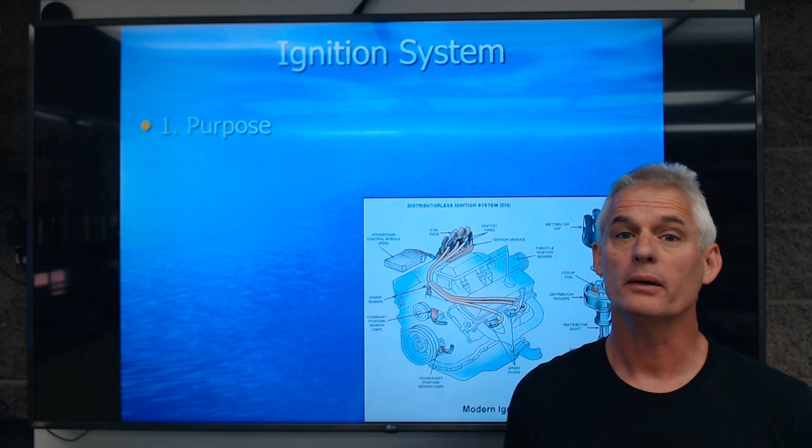Morning Auto 2. We're going to begin talking about the ignition system today, starting with the purpose of the ignition system. I'm going to give you an overview. In Auto 1, ideally I would have gotten to ignition system, but I didn't, so this may be a first go at it for many of you.

Here's a set of spark plugs with all different kinds and conditions. The main purpose of an ignition system is to ignite or create a spark that's going to thoroughly ignite the air-fuel mixture to do three things: maximize power, which is our teenager desire, maximize economy, which is your parents' desire, and minimize emissions, which hopefully is all of our desire.

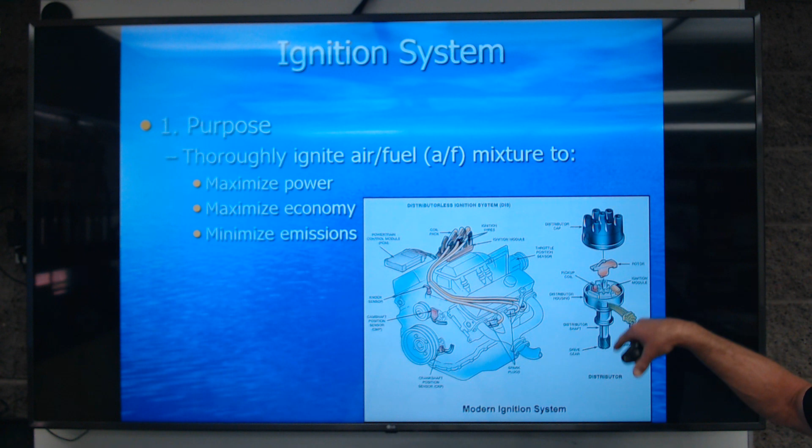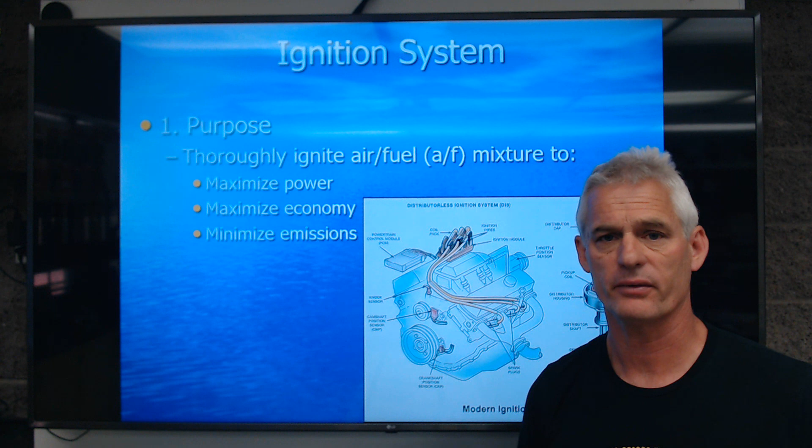Here's a simple old school ignition system with an electronic distributor. Here's what we call a distributorless or coil pack ignition—those go back several generations now. In any case, we want to thoroughly ignite the air-fuel mixture, which at sea level, the stoichiometric air-fuel mixture is approximately 15:1, ideal for power, economy, and emissions.

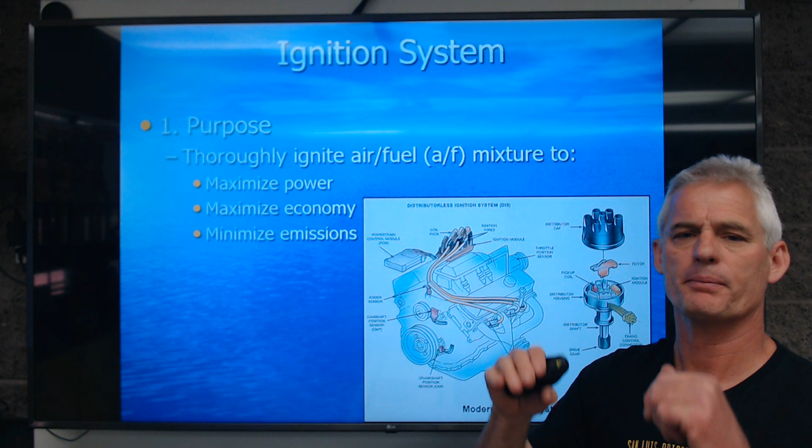If we want more power, we typically go richer. If we want more economy, we typically go leaner. And to minimize emissions, we stay in a happy balance between rich and lean.

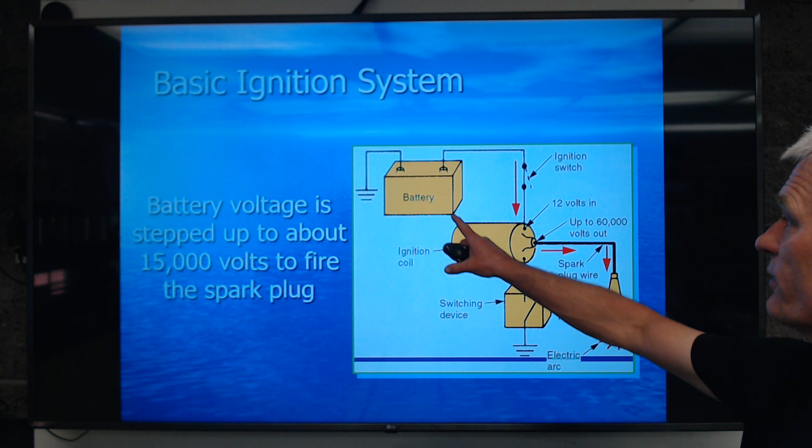A basic ignition system is going to jump up battery voltage, or once the car is running, charging system voltage, from approximately 14 volts to as much as 60,000 volts. That's kind of an average—most cars idle at about 10,000 volts. Under load, going up a grade, you might see 30, 40,000 volts.

So you've got a 12-volt battery, and charging system voltage when the car is running would be about 14. The ignition coil is a step-up transformer. This is an old school picture showing one coil for all cylinders, with some sort of switching device to turn this transformer on and off, and we'll talk about why. We're going to boost the voltage up to be able to jump that gap.

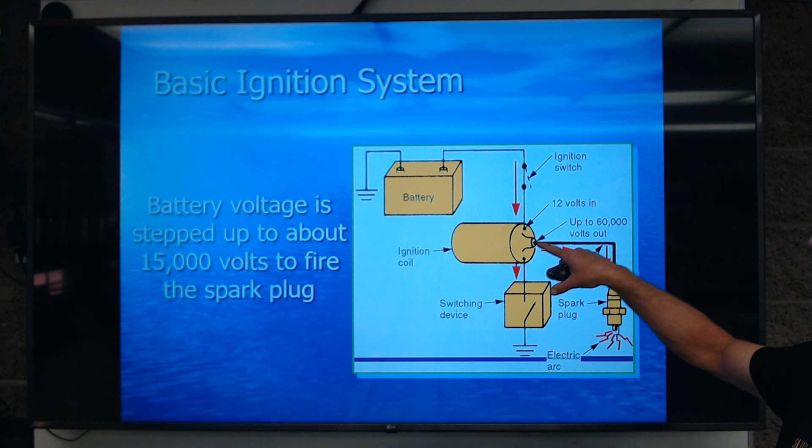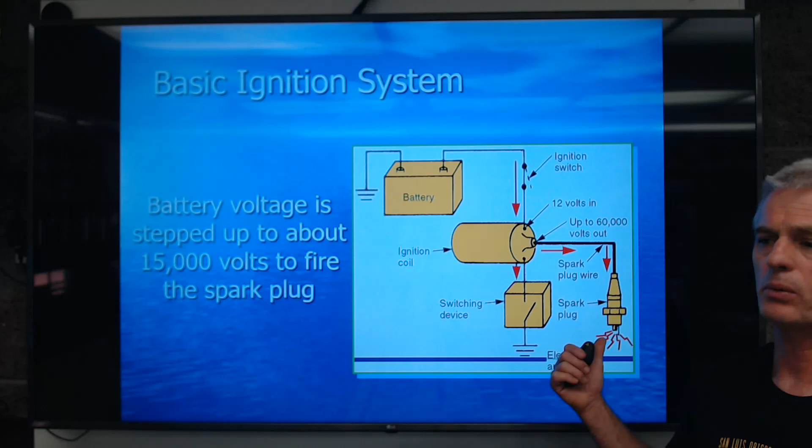That gap is difficult to jump, not only because of its distance, which is on average between 30 and 60 thousandths of an inch—not a very big gap—but cylinder pressure, air-fuel ratio, etc., will also make it very hard for the spark to jump the gap.

So the general function of an ignition system is we're going to turn this spark ignition engine on and off. Now, that was more true in old school cars. Today, when you shut the key off, we're turning the coil off, we're also turning the fuel pump off, and we're also turning the computer off, etc.

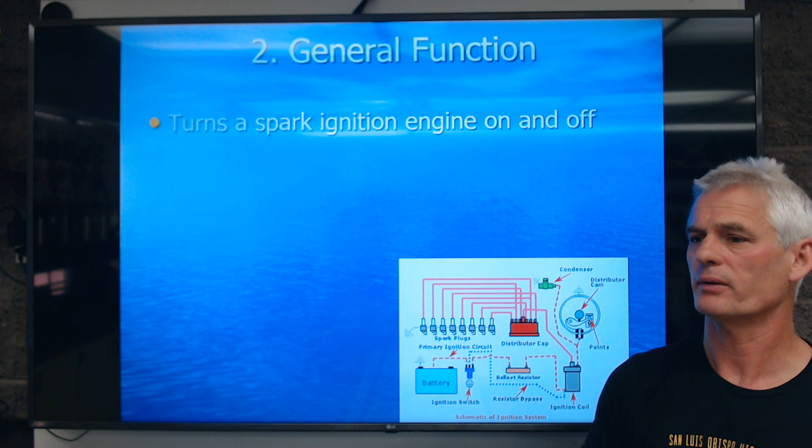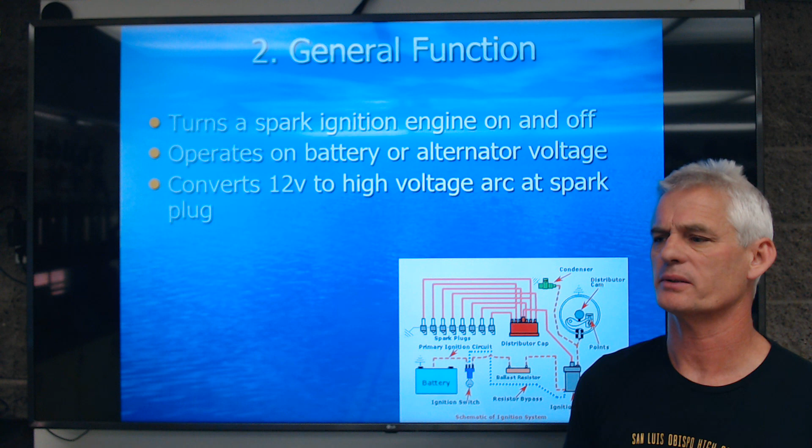Secondly, we're going to operate on either battery voltage when we're cranking or alternator voltage when we're running. We're going to convert 12 volts to a high voltage arc at the spark plug—and again, I say 12 volts generically, but when the engine's running, it's approximately 14 volts. We're going to distribute the spark to each cylinder in the correct sequence and at the right time.

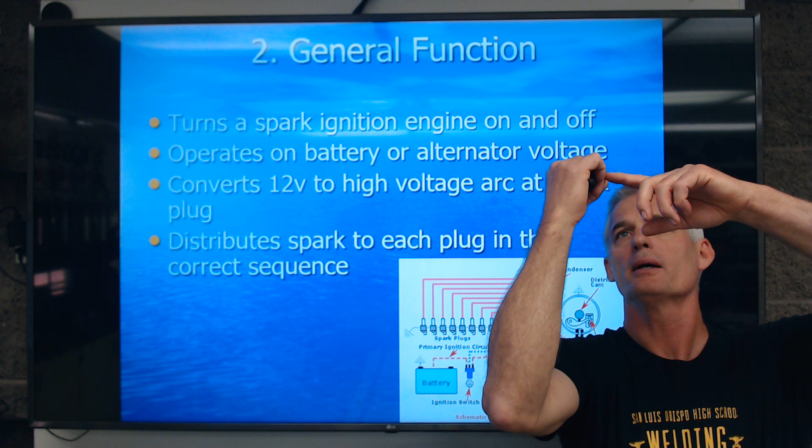So the right time—here's my piston: I go down on intake, I go up on compression, and I go down on power. The spark has to occur before the power stroke starts, obviously. In reality, we have to start the spark, typically at idle, about 10 degrees before top dead center, because it takes time for the explosion to expand and get ready to push. The faster the engine spins, the earlier we have to make the spark occur.

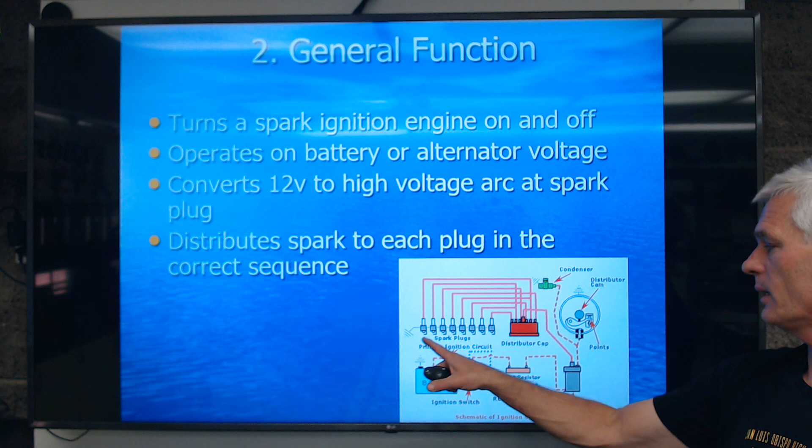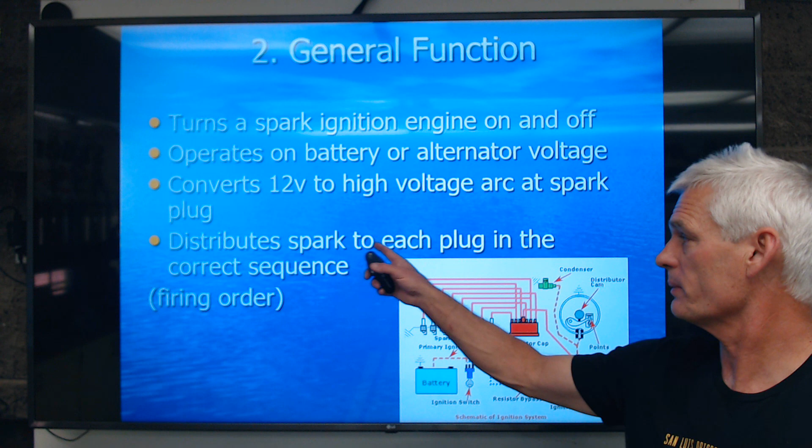Here's an old school distributor system with a distributor cap, 8 spark plugs, ignition key, a ballast resistor, a single coil, and a distributor with points. This was all gone by the mid-to-late 70s, but that is a basic old school ignition system. And when we distribute the spark to each plug in the correct sequence, we call it the firing order.

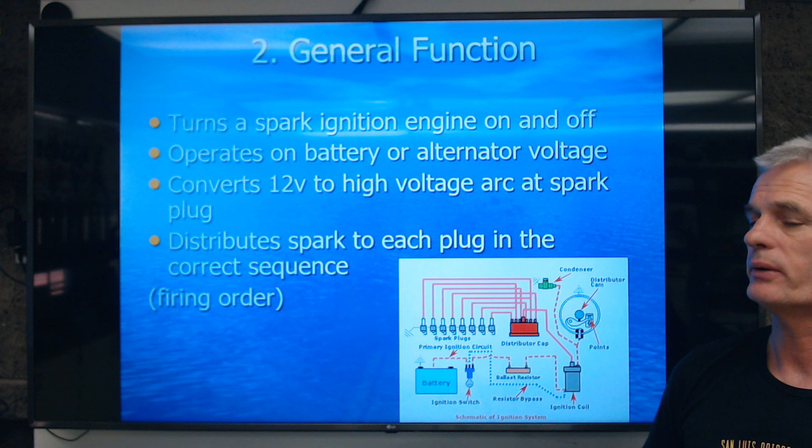So which cylinder is at the end of its compression stroke and needs a spark, and exactly when we do it, that would be timing. So we'd say, yes to number one spark plug as an example, but exactly how many degrees before top dead center is the timing.

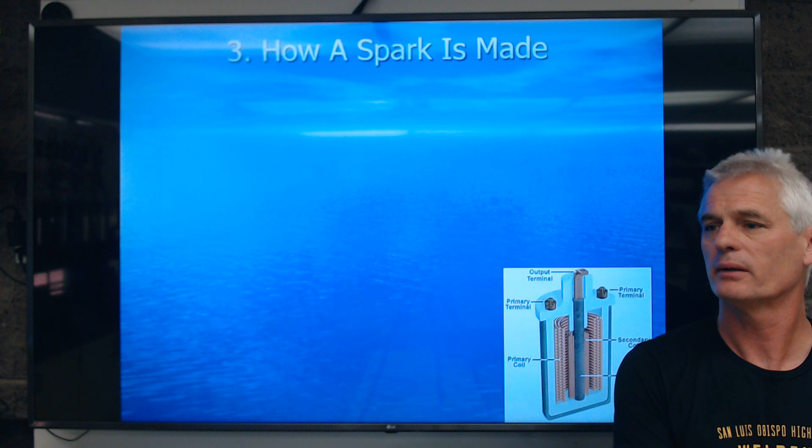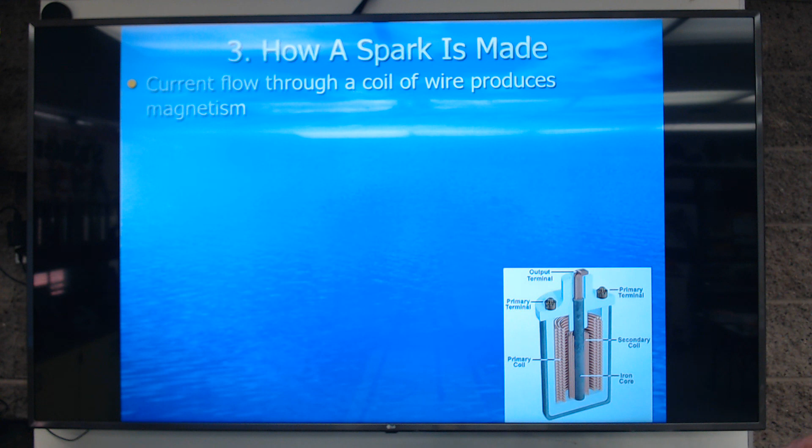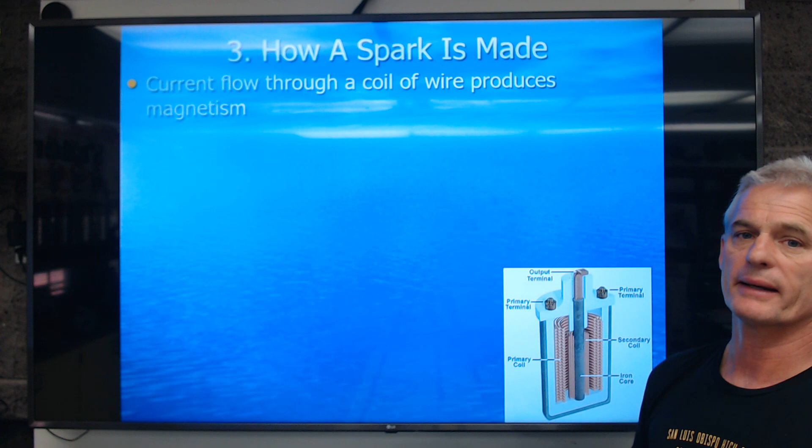How a spark is made: current flow through a coil of wire produces magnetism. Here's a picture of an automotive coil, and the insides of part of a coil. This is the primary wrapping of wire, insulated with plastic coating. If I put current through this coil of wire, I'm going to produce magnetism, and we call it an electromagnet.

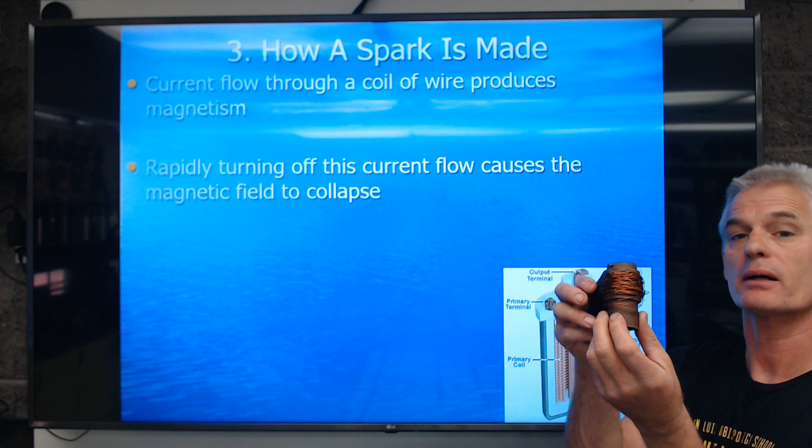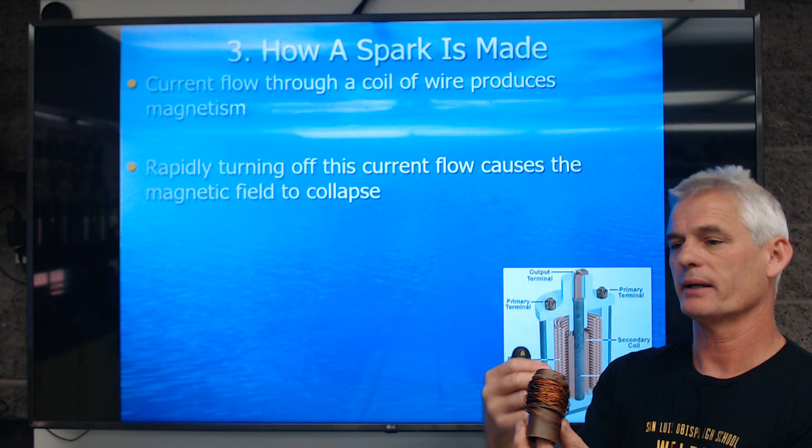And if I rapidly shut off the current flow through this coil, the magnetic field collapses out through air. If I have an adjacent coil—this one here is the secondary, which is actually down the center, because it both collapses out and in—I'll get a big surge in that adjacent coil. So a second adjacent coil will receive an induced high voltage current surge.

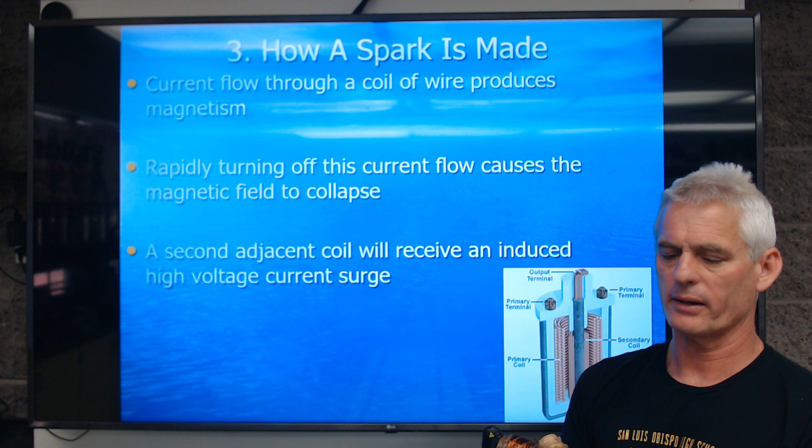Induced means to put into. So this guy, if I put current through this and shut it off, the magnetism causes a high voltage boost in this second coil, and the boost is dependent on the numbers of windings. The primary winding is a few hundred turns of about 18 to 20 gauge wire, and this is several thousand turns of super fine wire.

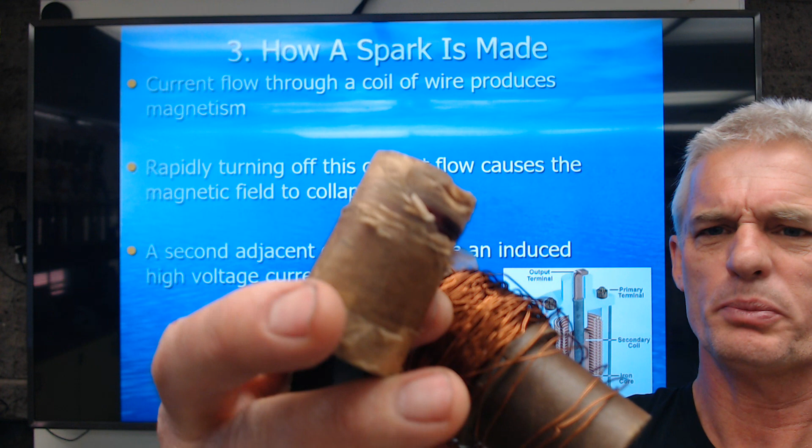I'm going to go up to the camera, I don't even know if you can see it, it's like hair, super super fine. So this is what we call coil action: turning on the electric current flow through the primary windings of the coil, then shutting that off, which causes a high voltage induction into the secondary winding, causing a boosting effect in the voltage—that's coil action.

The transformers on the power poles in your neighborhood are step-down transformers. I believe they step down from approximately 4,000 volts to 110 volts. All houses have two 110-volt lines going to them. If you need 220, which most houses do for some device like an electric dryer, oven, or hot tub, we combine those two 110-volt wires, or legs, with a special breaker on the panel.

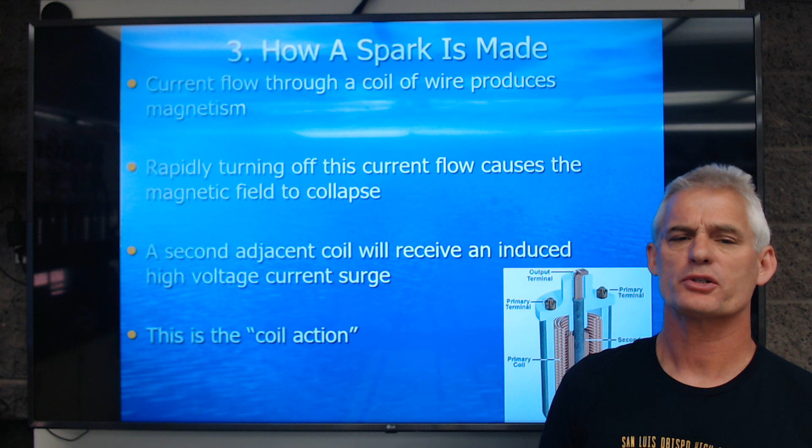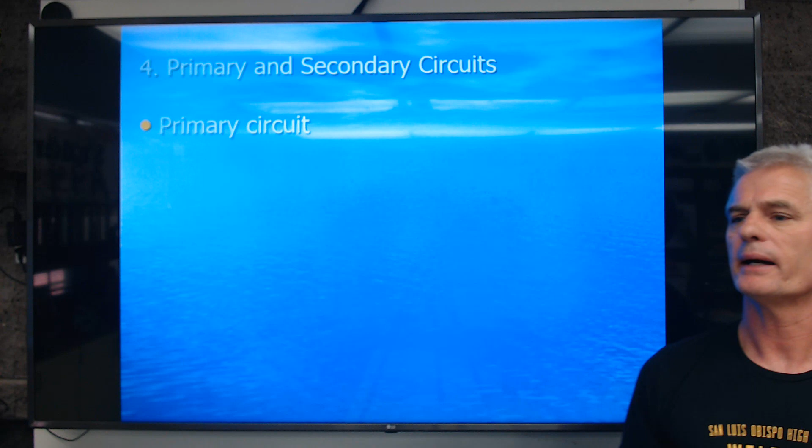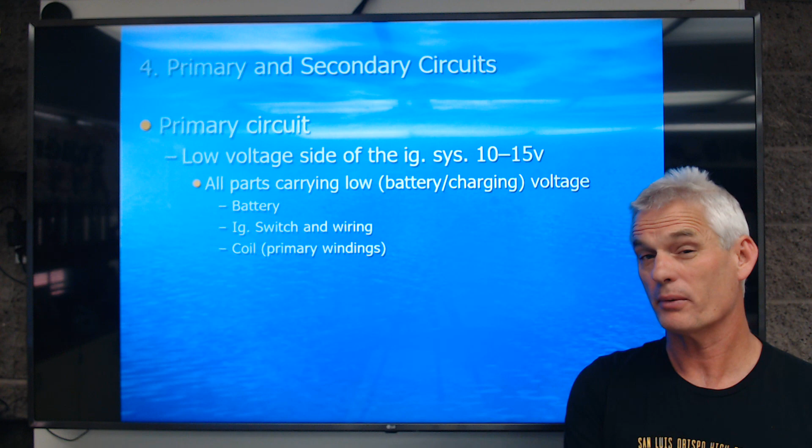So there's two circuits to an ignition system: the primary circuit and the secondary circuit. The primary circuit is all those low voltage components in the ignition system—all parts carrying battery or charging system voltage: the battery, the ignition switch and wiring, coil primary windings, which I already showed you, and a switching device.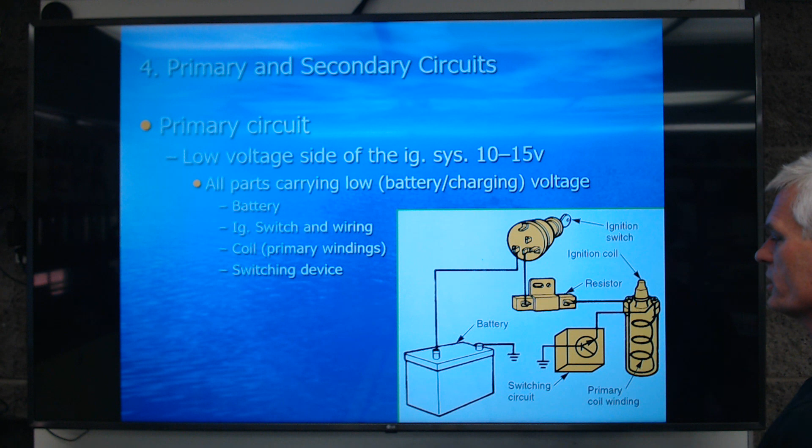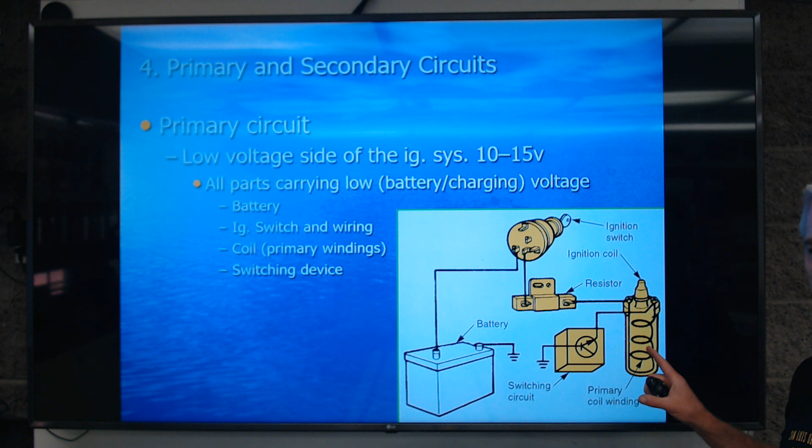So now if you look at the picture, the primary circuit is all the low voltage carrying components: the battery or alternator, ignition switch, whether it's a key start or push button. Older cars have what's called a ballast resistor, some sort of switching device to turn the current flow through the primary windings of the coil on and off. This picture isn't very accurate since it only shows 3 loops, but there's actually several hundred in the primary winding. That's the primary side of the ignition system, all the low voltage components.

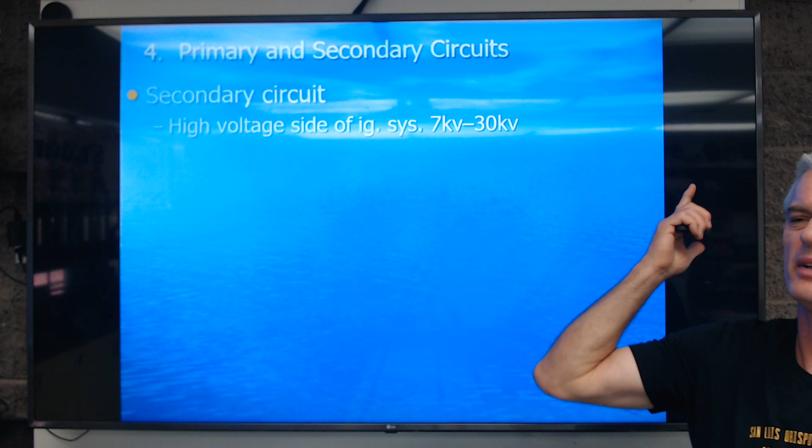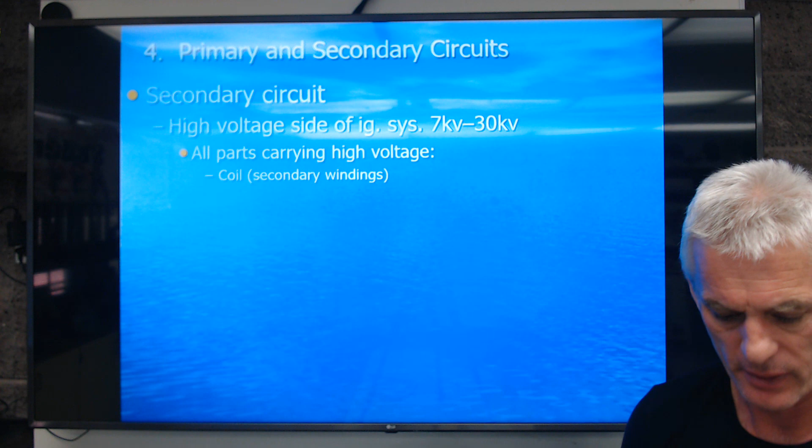Here's the secondary side—the high voltage side. I say 7 kV, 7,000 volts, up to 30,000 volts. Can go higher, usually not lower. So that secondary is all the parts carrying high voltage: the coil secondary windings, the one I showed you, the hair-like wire.

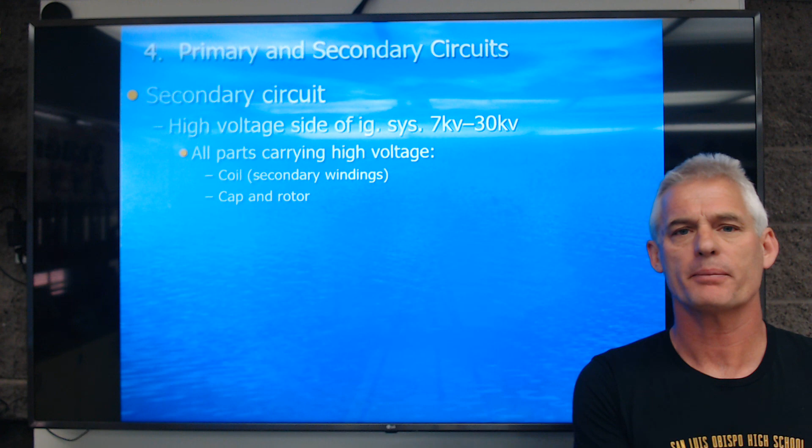Cap and rotor, I'm going to show you this in the picture. If we have a distributor type system, it's got a cap and rotor, then plug wires and plugs. All cars have spark plugs no matter the type of system—the only cars that don't are diesels. The distributor has a cap and a rotor that spins and distributes the spark from the center coil terminal to each one of these in the correct firing order.

Well, this is old school cars—we got rid of the distributor and cap and rotor on GM passenger cars in the late 80s.

Honda's always the last one to change everything. Honda changed away from a distributor on their Civics. I believe the last year for the distributor was 2000, and 2001 is coil on plug.

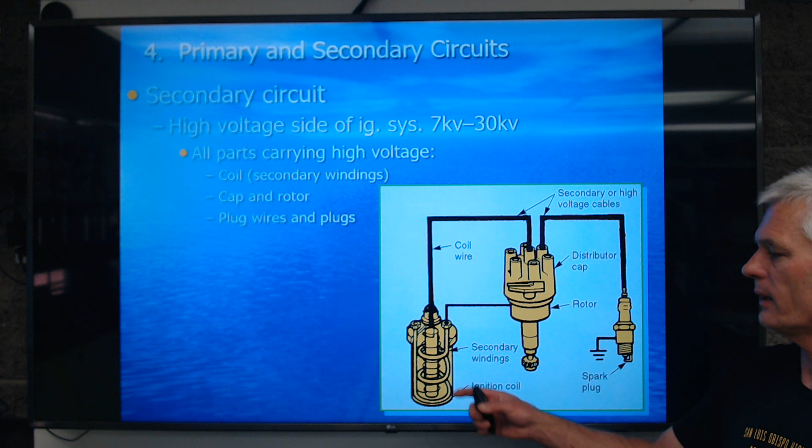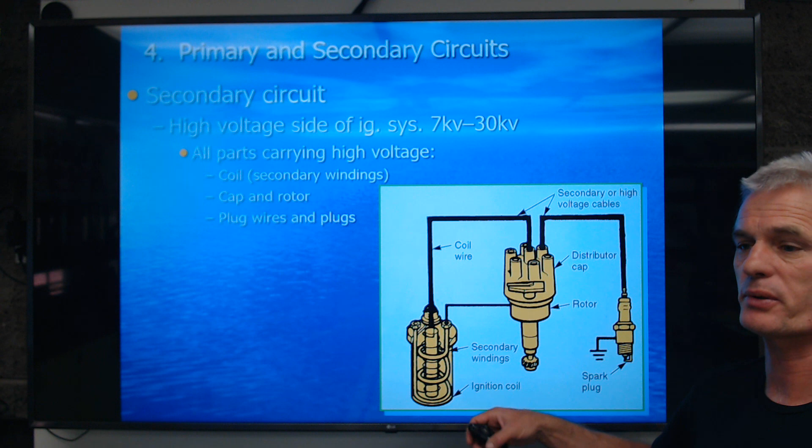This is a single coil. All cars today have either one coil pack, which is a group of 2 or 3 coils, or they have individual coils per cylinder. That's the secondary circuit. So I'm going to talk about types of systems really quick.

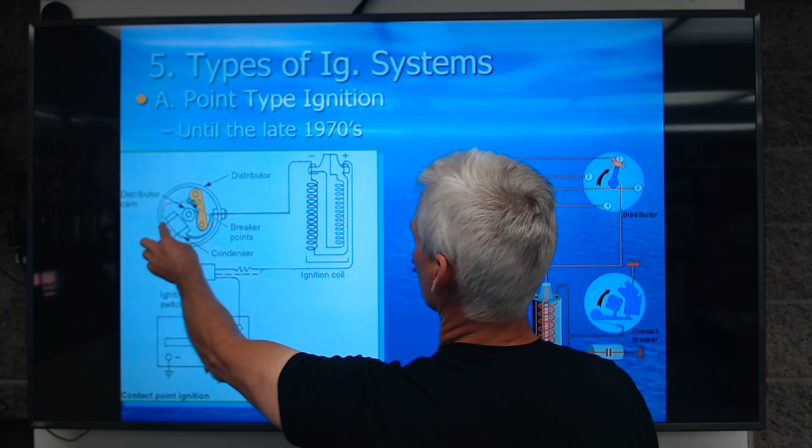The first one is a point type system that we had until approximately the late 70s, where you had a battery and an ignition switch that sent power through the primary windings, making a magnetic field through these little contact points to ground. This is a spinning shaft inside the distributor. When it pushes on that rubbing block, it opens the points, which breaks the contact to ground, which stops the current flow, which causes a magnetic field collapse and a high voltage surge that goes over to the spark plugs. That's a point type system.

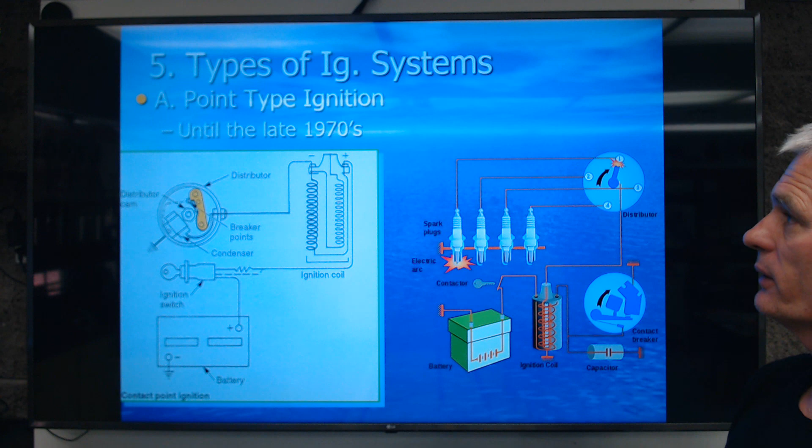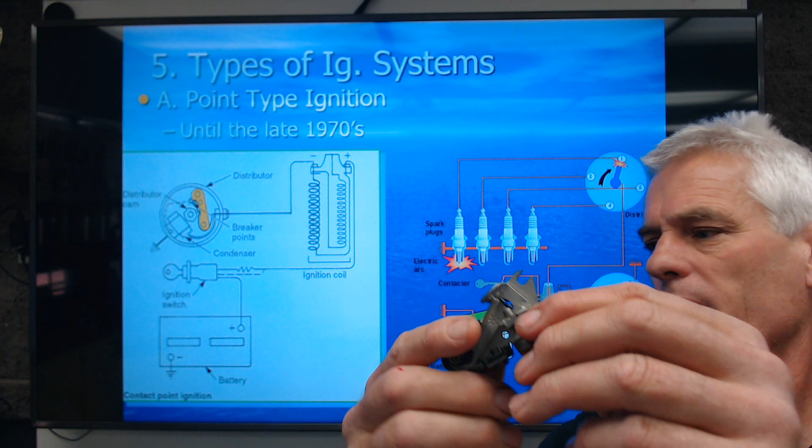I'll grab a set of points and show you here. So here's a set of ignition points, these little guys. I think I can make it so you can see them in the camera. So when this would open like that, that would break contact to ground or provide contact to ground.

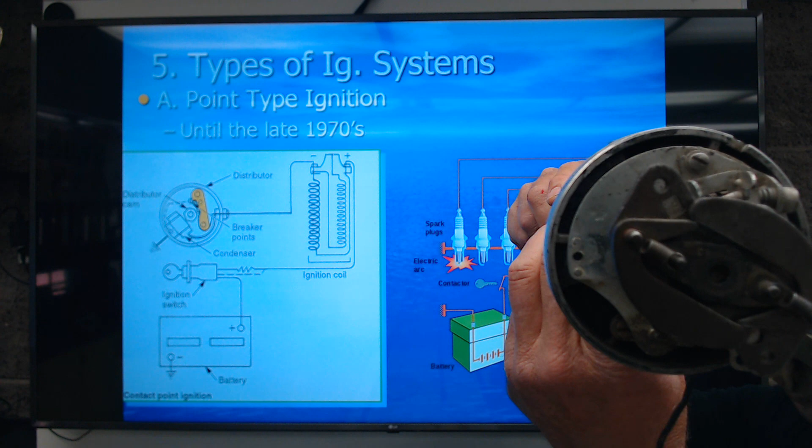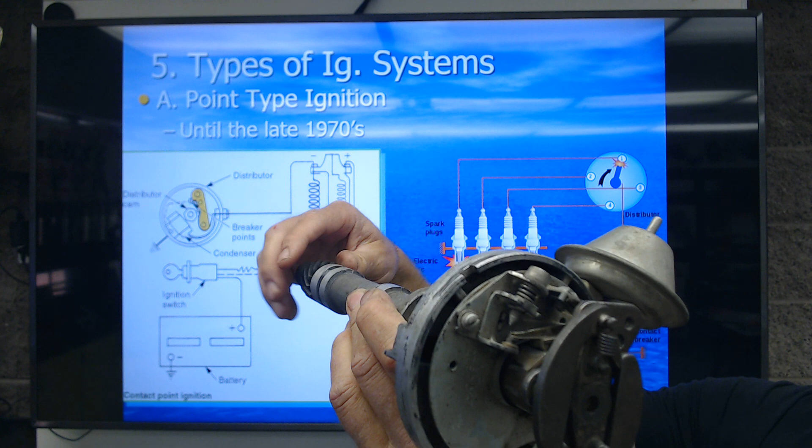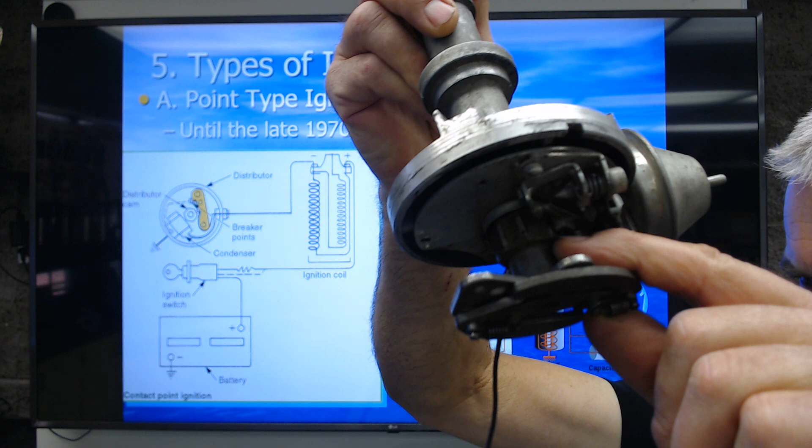So here's a point type distributor. Hopefully you can see those points. I don't know if I have enough light there. As this guy turns around, you'll notice the little point right there is going to open. So there it opens right there, and closes and opens. And I'll show you what it's touching - it's touching right there. Let me see if you can see it with the light. Not as easy as you think to do this.

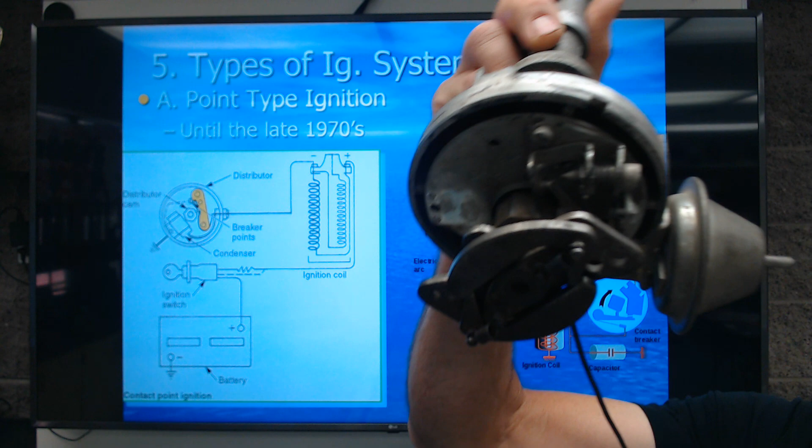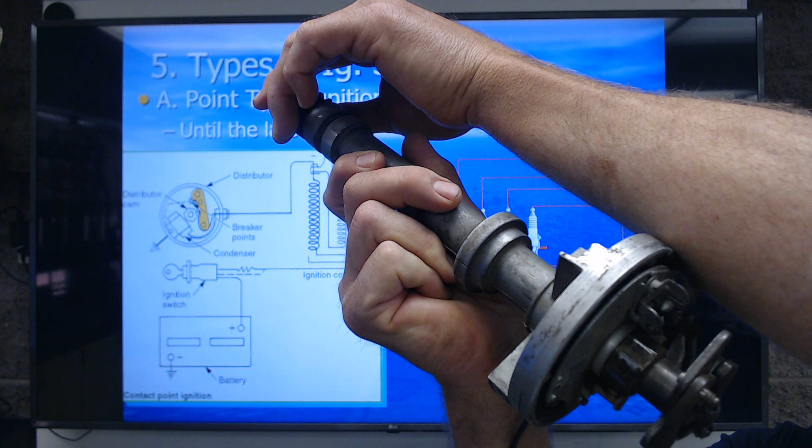Hopefully you can see where that thing's rubbing right on that distributor cam. So this cam has several points - each tip or point on it, we call it a distributor cam, as you see it spinning, corresponds to the number of cylinders. This is an 8-cylinder, so there's 8 of those evenly spaced around the circumference of the shaft of that distributor. So that was till the 1970s.

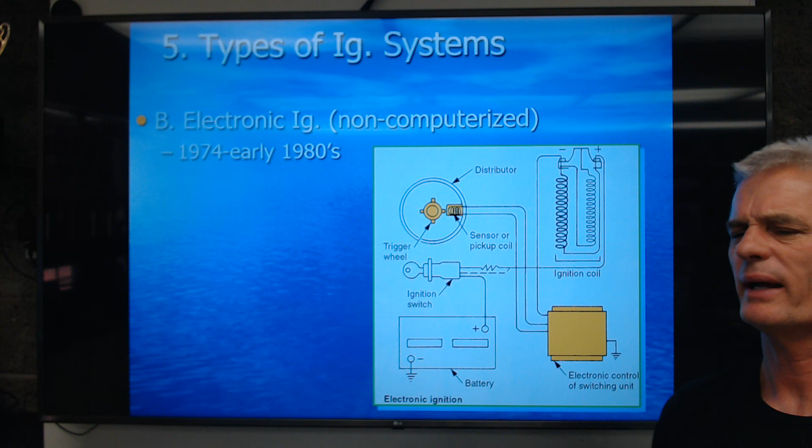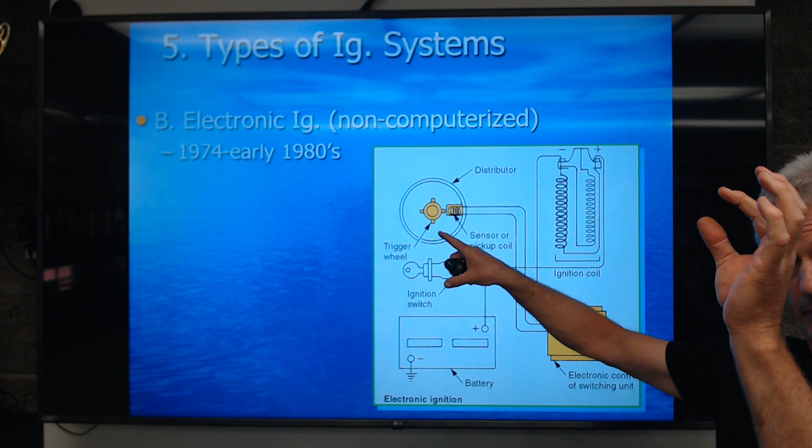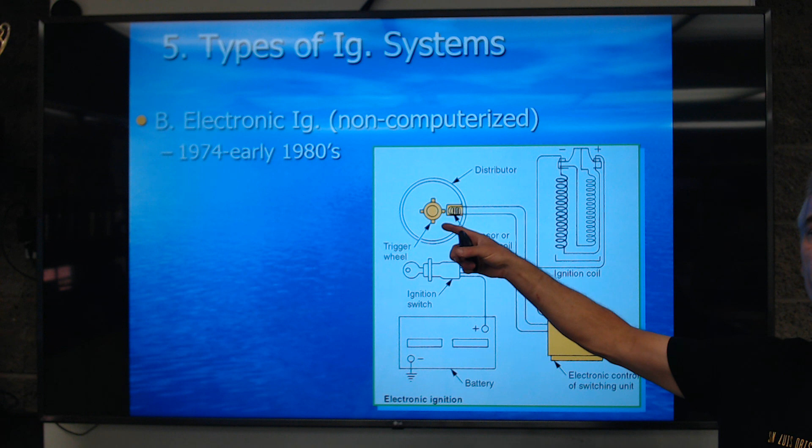So if I can get this thing to advance, there we go. In 1974, approximately to the 80s, we went to what's called electronic ignition. We still had a single coil firing all the cylinders, still got spark plugs, still got a battery and ignition switch. But instead of having those rubbing, contacting points, which every time they would open would arc and burn the faces of those points - these little faces down in here would get burned every time they open and then close and open, you get an arcing there - that became a high failure rate, and we wanted to improve emissions.

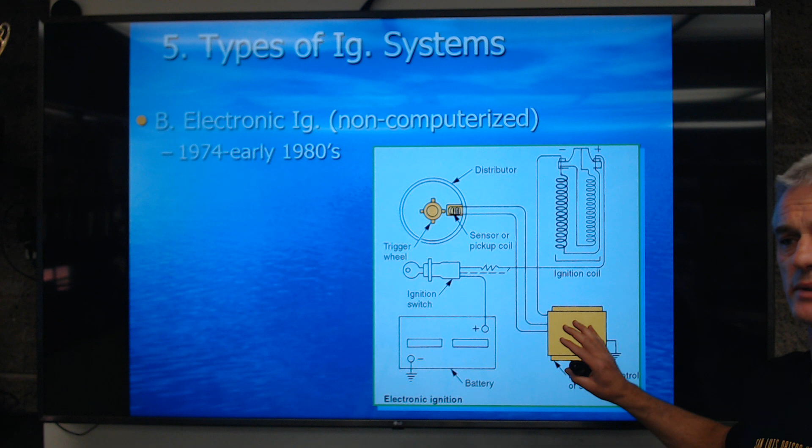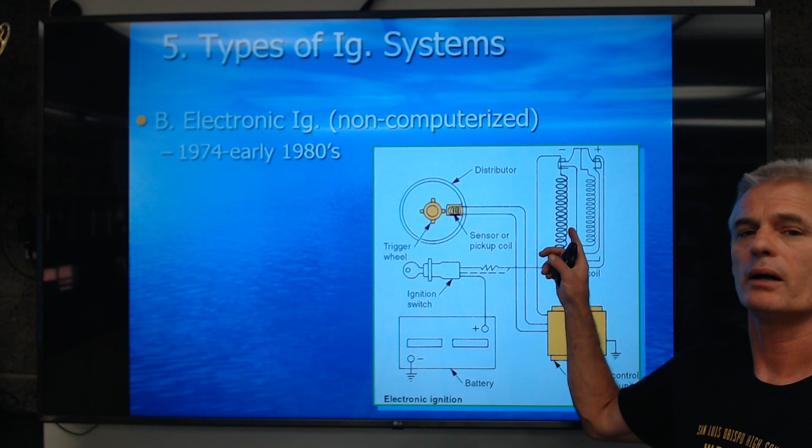So we wanted to get ignition more stable and consistent. So we figured out we could come up with what we call a magnetic pickup with a transistor, which is a fully electronic on-off switch. And with these two together, we could turn on and off that coil primary circuit much more quickly, which causes a hotter spark, and much more dependably too.

In the early 80s to late 80s, we came up with computerized electronic ignition. Still had a distributor similar to what you had, but now we had a computer involved. So the computer is going to say, okay, given this throttle angle, the vehicle speed, gear shift selection, the amount of load against the vehicle, I want 42 degrees before top dead center. So the computer is involved in adjusting when the timing occurs, and you're no longer able to adjust it at this point - you're not supposed to.

So here's kind of a summary: point type until the 70s, electronic ignition into the 80s, computerized ignition early 80s to late 80s, and then the next system is the DIS.

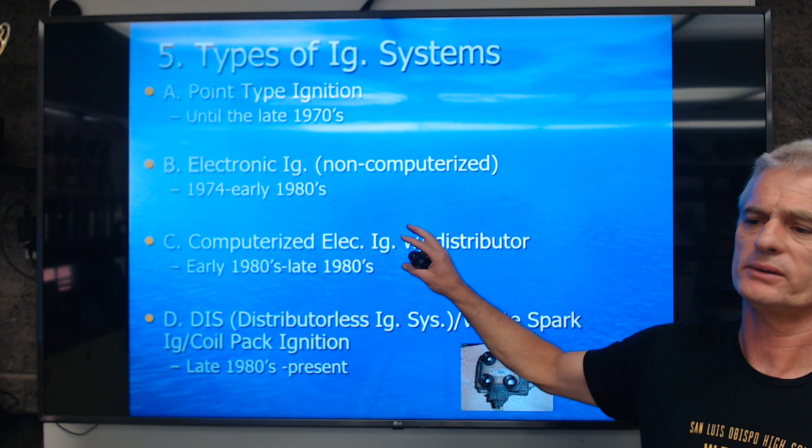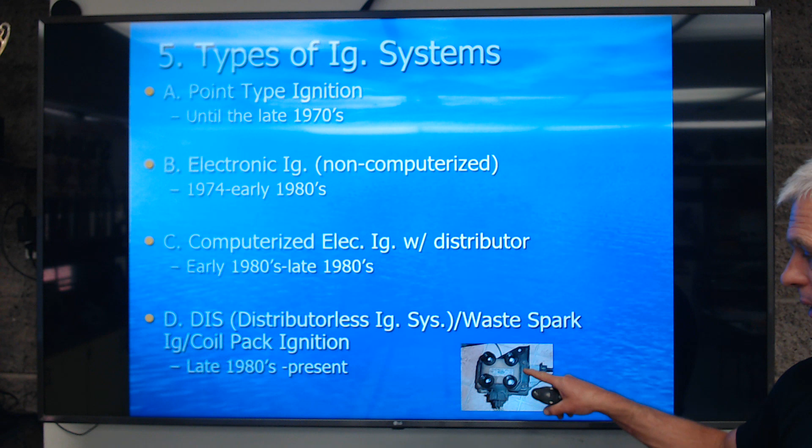The DIS is also known as a waste spark system or a coil pack ignition. So there's a picture of a coil pack - it's actually a coil here firing these 2 cylinders and a coil here firing these 2 cylinders. I'll grab one sec - so here's a coil pack.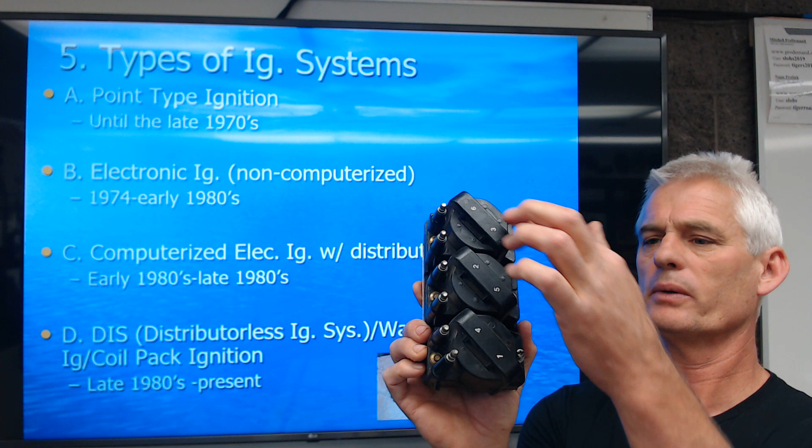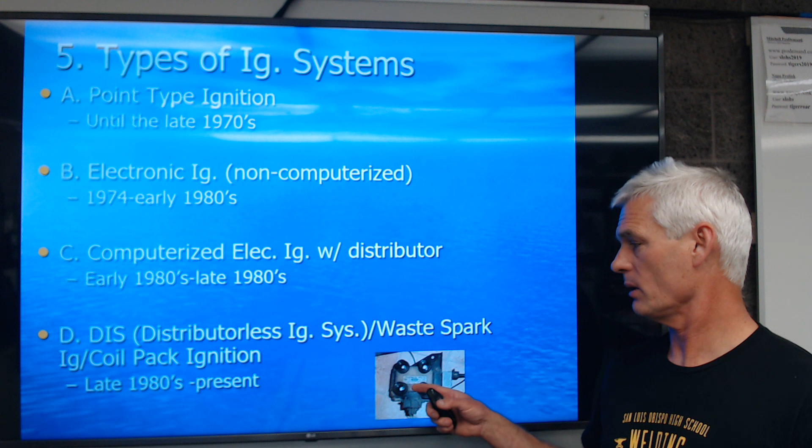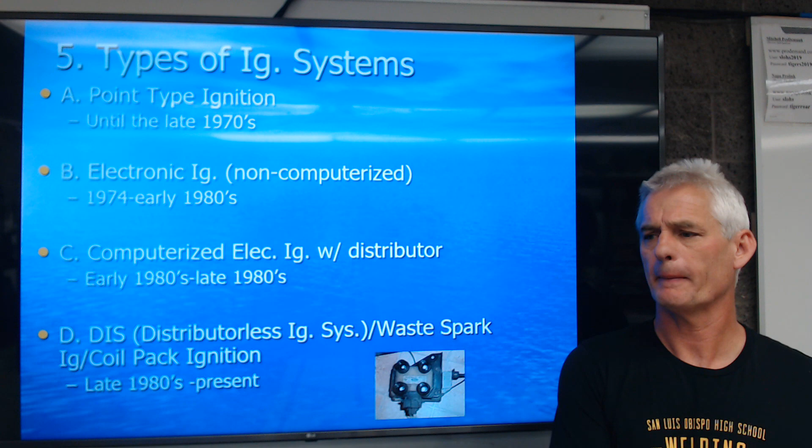This is a GM coil pack for a 6-cylinder: 3 coils, each one firing 2 cylinders at the same time. This way we get rid of a distributor. There's no more rotating distributor. Ignition is able to have a stronger spark because now each coil is only firing 2 cylinders instead of one coil firing 6. This was all the way up till, pretty modern, cars to 2010, 2012 still had some DIS or coil pack ignition.

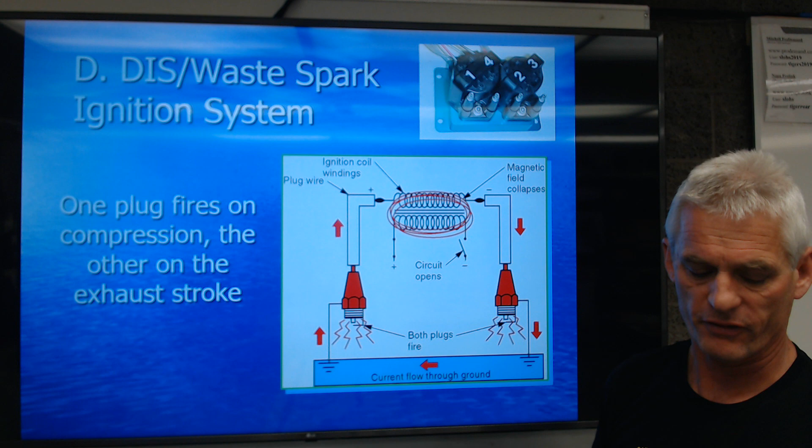So here's a picture of it. Again, there's 2 coils for a 4-cylinder, each firing 2 cylinders at the same time. It says one plug fires on the compression stroke and the other fires on the exhaust stroke.

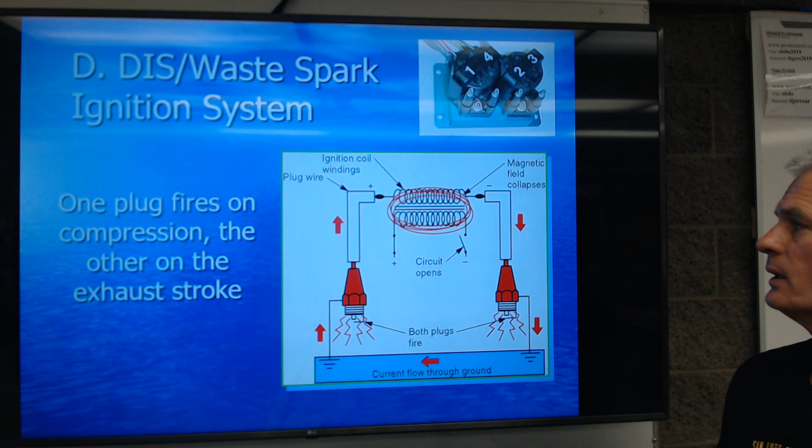So what you're seeing in the picture is a DIS or waste spark ignition system. It's showing how the secondary winding is run - this is the primary winding, heavy turns of a few hundred turns of heavy wire, and this is several thousand turns of fine wire. The picture's not accurate because they're showing the same thickness of line and the same numbers of loops, but the secondary is wired to one plug and then over to the other plug.

So when it fires, when it gets the high voltage surge, we jump from center to side electrode, make a spark. We also jump opposite polarity side to center electrode and get a spark. This cylinder is on compression, this cylinder is on exhaust. The exhaust spark does nothing. It serves no purpose other than the simplicity of wiring and having one coil firing 2 plugs.

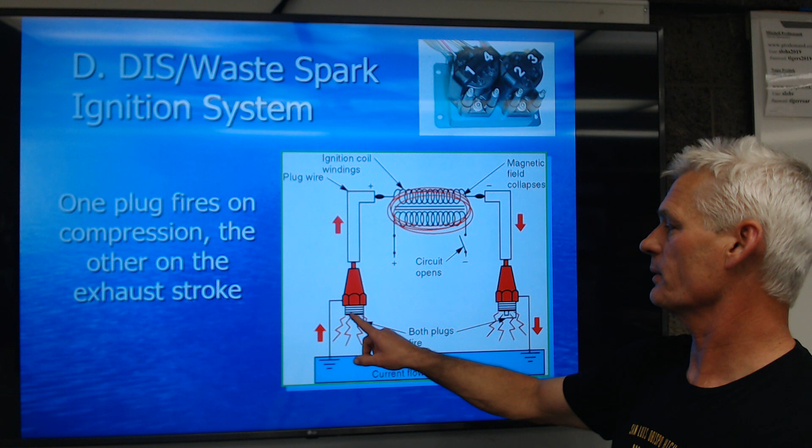These are what we call companion cylinders. When this one comes up on compression, this one's going to be on exhaust. Okay, so let's keep going here.

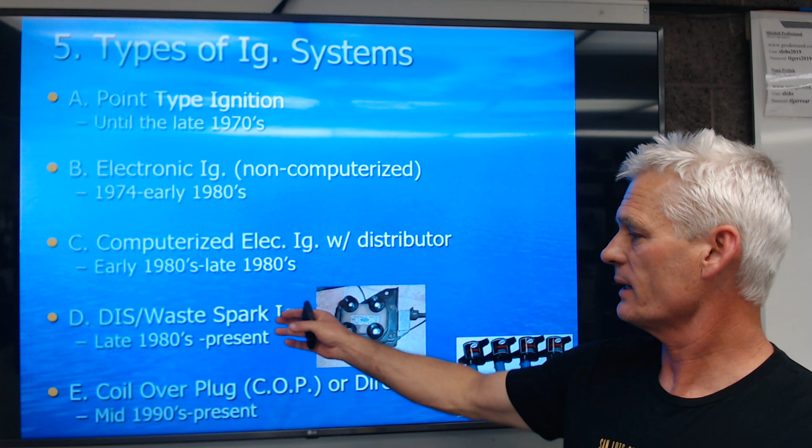So here's our systems again: just point type, electronic ignition, computerized with distributor, DIS. And the last system we want to look at is coil over plug or coil on plug, COP, or direct ignition - other names for it. But we just call it coil on plug or coil over plug. And it looks like this.

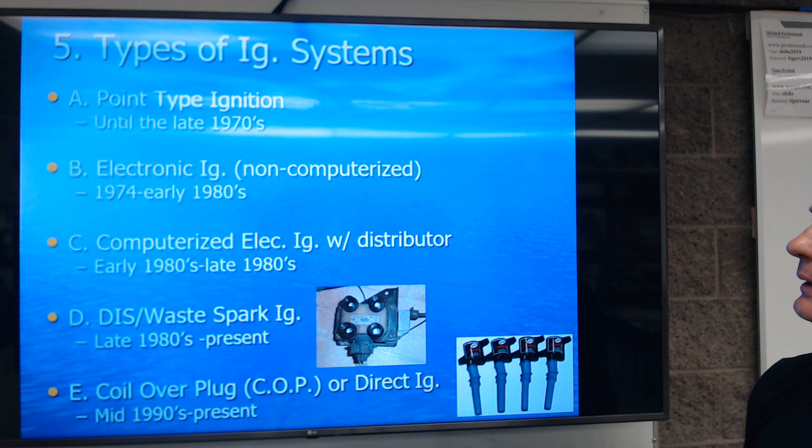So direct ignition or coil on plug: we have an ignition coil mounted over each spark plug. There's no spark plug wire. The plugs are only fired at the end of the compression stroke, and plugs do not fire in the exhaust stroke. So this would be a 4-cylinder, and you've got 4 coils, and this would look like this.

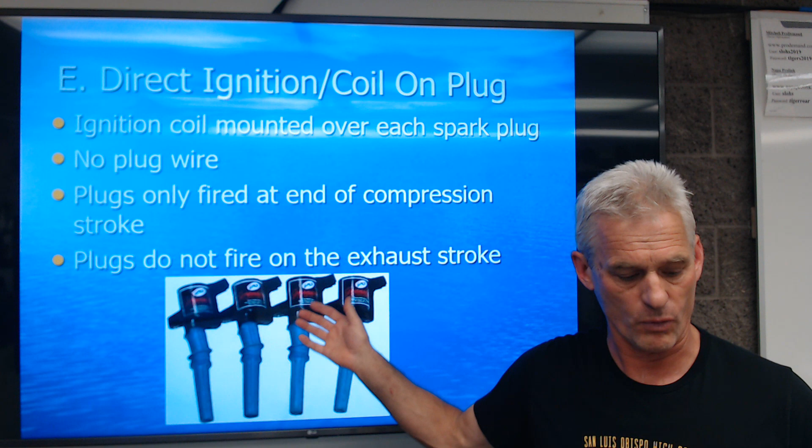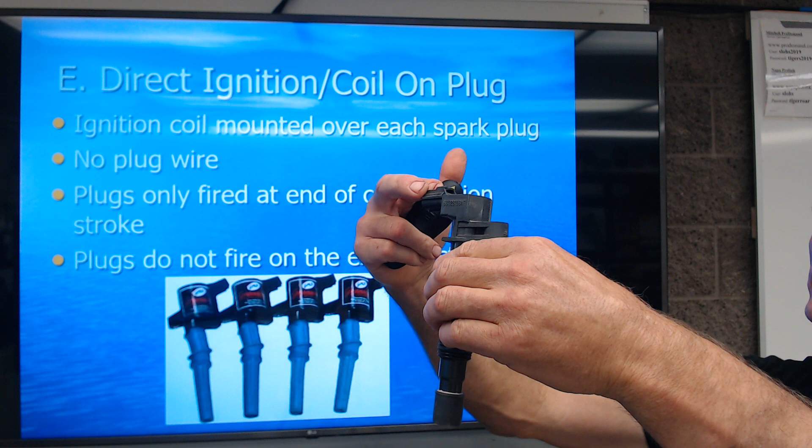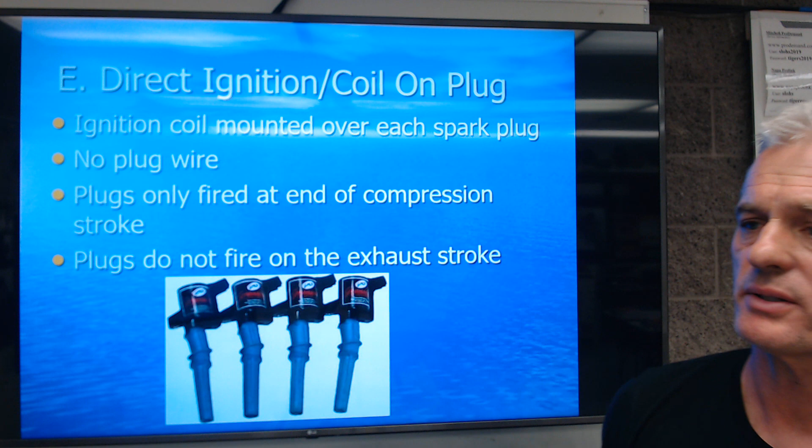So here's one coil on plug coil, and it just snaps right down on the spark plug, and it's got some primary wires going to it. This thing's a little ignition transformer, just ups our 14 volts from the charging system to 10,000 volts or whatever we need to fire the spark depending on the need at the moment. This is down underneath the valve cover, just showing a coil straight on a spark plug.

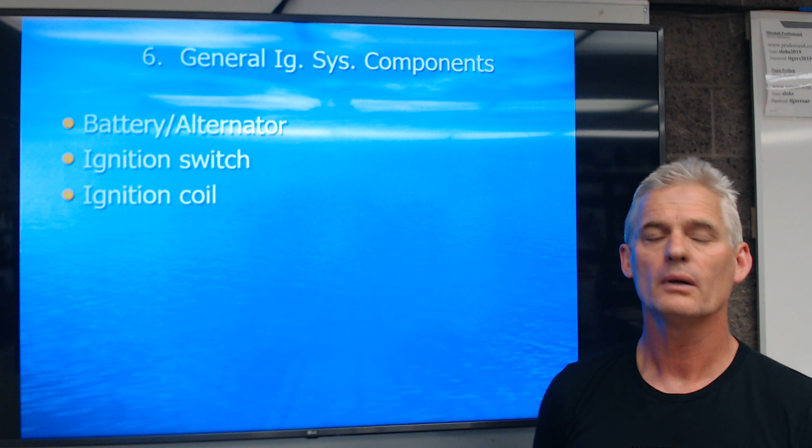So, general ignition system components. Every system has a battery or an alternator. Every system has an ignition switch, whether it's a key start or a push button. Every system is going to have an ignition coil, at least one, or maybe one for every 2 cylinders, or maybe one for each cylinder. And then we have to have some sort of triggering device - some sort of device that's going to turn on and off that coil primary current. So it used to be ignition points that I showed you.

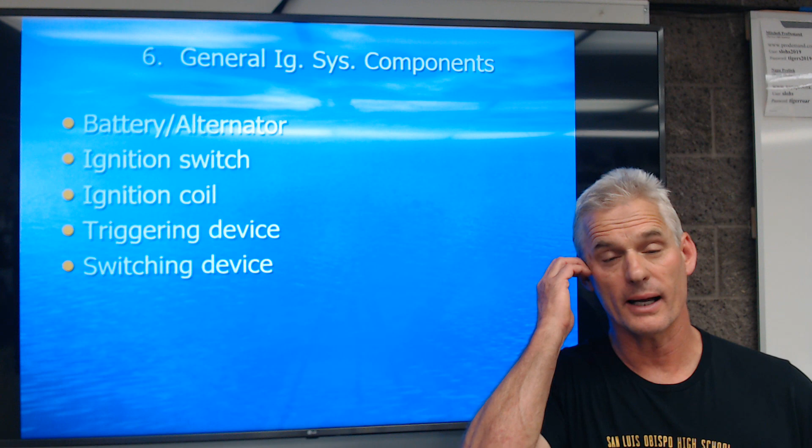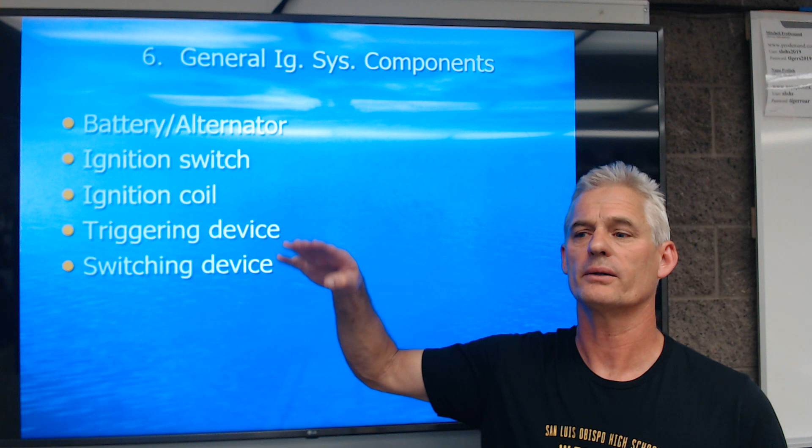Now we use a little box called an igniter or an ignition module. So there's 2 devices - a triggering device is the device that sends a little signal to the transistor in the ignition module. The ignition module is the switching device that turns on and off the primary winding ignition current. The triggering device tells it when to do that, basically.

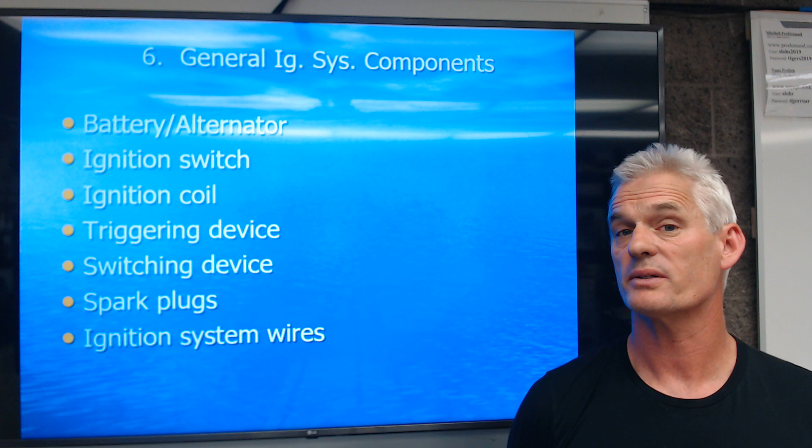And then we've got spark plugs, and then we have spark plug wires. Some cars, not all cars, have spark plug wires. If it's coil on plug, we don't have plug wires anymore. And that's it for our general overview. We'll talk about these things specifically in our next lecture.